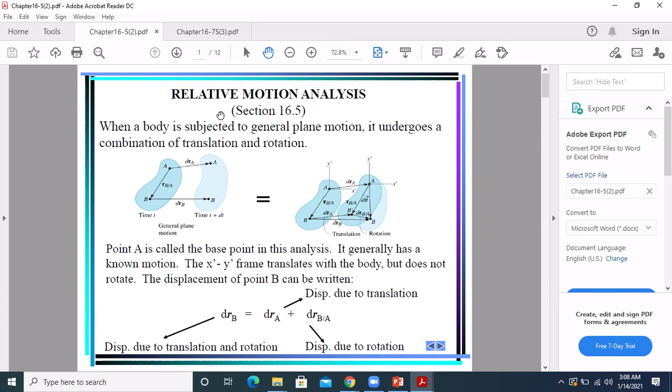لو اعتبرنا عندنا هذا rigid body بدي اقسم الموشن تبعته، طبعا هون اجي اعمل translation and اعمل rotation about an axis passing through point A اللي هي بنسميها البيس point A. So بدي اقسم الموشن كالتالي، بدي اخليه يعمل translation. خليني بس هون اعمل full screen.

بدي اخلي الريجد بودي هذا يحافظ على الروتيشن تبعه بالبداية، يعمل translation at this point، فمشى مسافة dr A اللي هي جزء من البوزيشن او displacement تاعت البوينت A اللي مشيتها because of translation لحاله. بعدين هذا الريجد بودي عمل rotation about an axis passing through point A عشان ياخد هذا الشكل النهائي، الشكل تبعه ما تغير.

فعمل translation DRA فالبي البوينت بي بسبب الترانزليشن موقعها موجود هون. بعدين صار في روتيشن للريجد بودي فصار الفاينل بوزيشن تبعها هون، يعني هاي الفاينل بوزيشن تبع B اللي بيست على الترانزليشن او روتيشن. بدي اقسمه ل translation first then rotation.

فصار عندك ال DRA اللي هو بيست على الترانزليشن، وهذا ال DRB اللي هو final position اللي هو ناتج من ال DRA plus this rotation of B من هذا اللوكيشن لهذا الفاينل لوكيشن اللي هو عبارة عن DRB with respect to A، لأنه احنا بنحكي ال rotation about a point passing about an axis passing through one of the points اللي هي point A بهذا الكيس تبعتنا. فصار عندي DRA plus DRB with respect to A عبارة عن DRB.

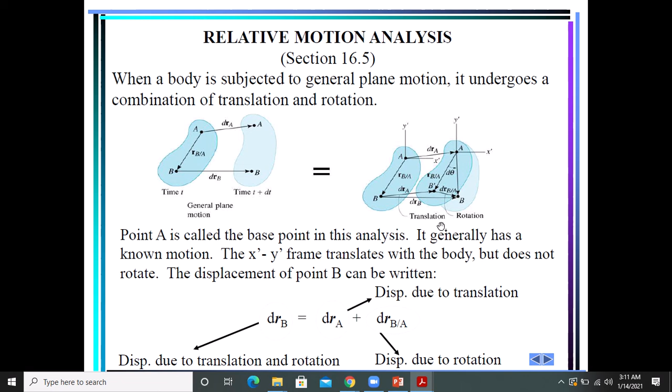So the velocity of point B is given as بدك تاخد dt for this one and this one. So drb by dt عبارة عن dra by dt plus drb with respect to A by dt. drb by dt اللي هي الابسوليوت velocity of point B اللي هي الفاينل، يعني velocity of point B الناتجة من translation and rotation، عبارة عن velocity للpoint A اللي عم بيعمل pure translation plus the velocity of point B with respect للروتيشن اللي حصل about point A.

فهي whatever rigid body عم بيعمل whatever الموشن تبعته general plane motion VA، الريجيد بودي هيعمل translation، هيكتسب A و B the same velocity بسبب translation. then B هتكتسب another component velocity بسبب rotation of rigid body about an axis passing through point A اللي هو عبارة عن الأوميجا في RB with respect to A.

Since the body is taking as rotating about point A, VB with respect to A اللي هي عبارة عن dr B with respect to A by dt عبارة عن أوميجا cross RB with respect to A. Here omega will only have a k component since the axis of rotation is perpendicular to the plane of translation.

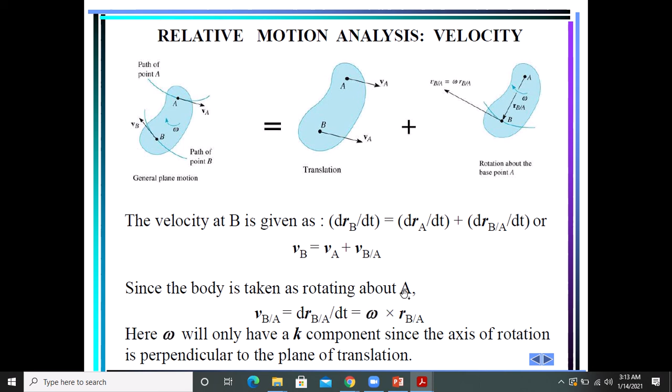حكينا already احنا نشتغل على planar motion، فاحنا راح نعتبر ان الموشن تبعتنا translation بال x y plane، وبالتالي rotation about an axis passing او perpendicular للـ x y plane اللي هو ال k axis او الـ z axis.

طيب ناخذ example relative motion analysis velocity.

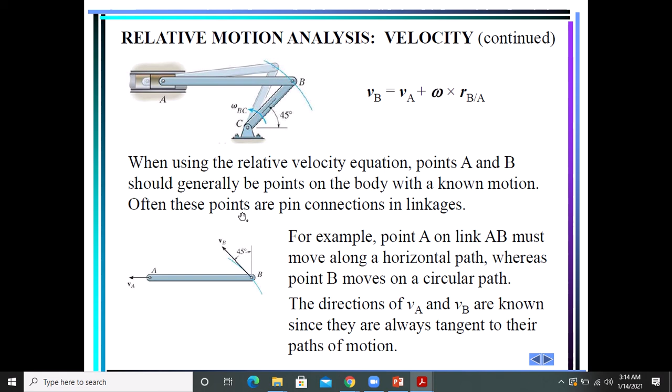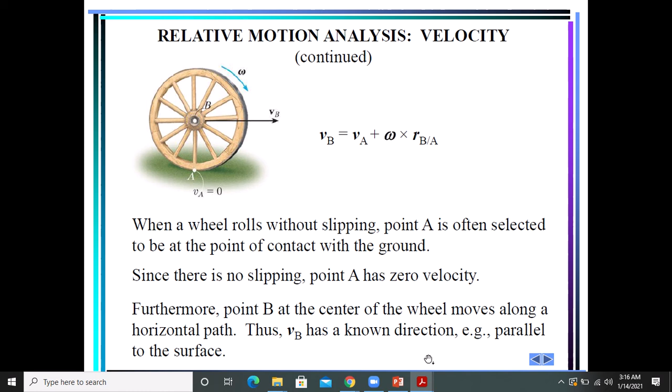Since there is no slipping, point A has 0 velocity. Furthermore, point B at the center of the wheel moves along a horizontal path. Thus, the velocity of B has a known direction parallel to the surface, for example whatever.

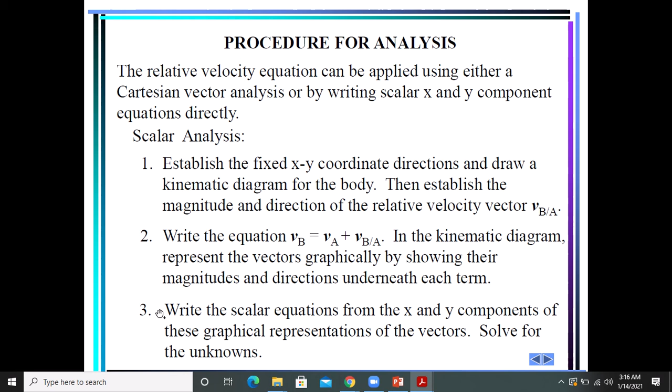Procedure for analysis: establish fixed XY coordinates, not coordinates translating with the system or with the rigid body. Write the equation in the kinematic diagram. Write the scalar equation from the XY components. Solve for the unknowns. If you want to work with vector analysis, you need to determine XY, take whatever vector components are present, express vectors in Cartesian vector form. If the solution comes out negative, of course it's opposite to the assumption you made, and so on.

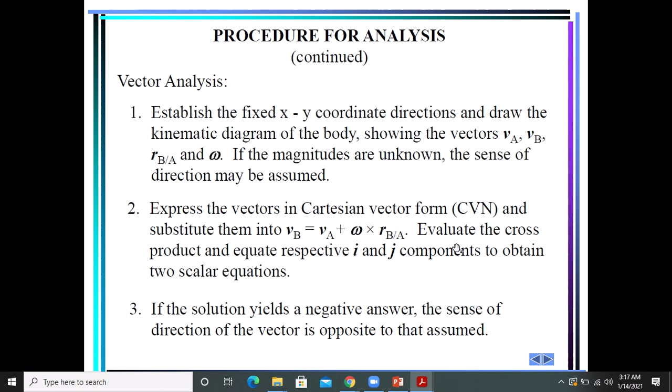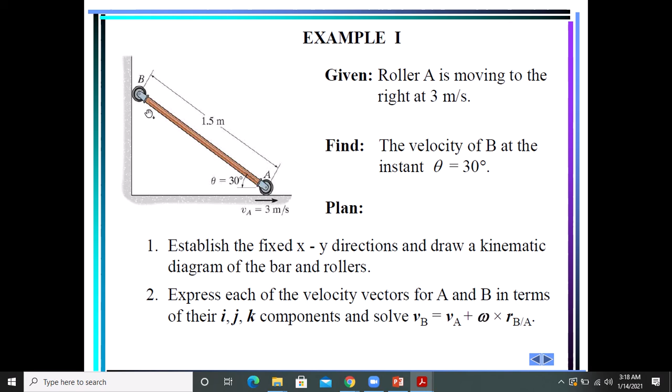If we apply the equation: velocity of B we know its direction is negative J, velocity of A we know its magnitude and direction which is 3 meters per second along the positive x direction or along I. Omega is along K, and RB with respect to A, from A to B, take 1.5 cosine 30 negative I with sin 30 positive J.

So again apply the equation: velocity of B equals minus VB in the J direction, velocity of A equals 3I, omega in the K direction crossed with the vector from A to B of 1.5 meters, so 1.5 cosine 30 negative I, 1.5 sin 30 positive J.

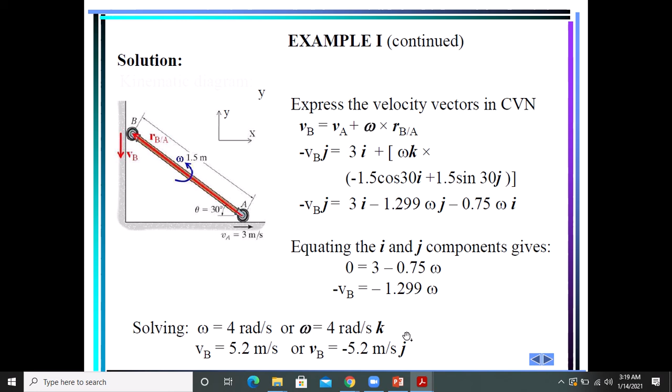So relative motion analysis, acceleration analysis for velocity and acceleration.

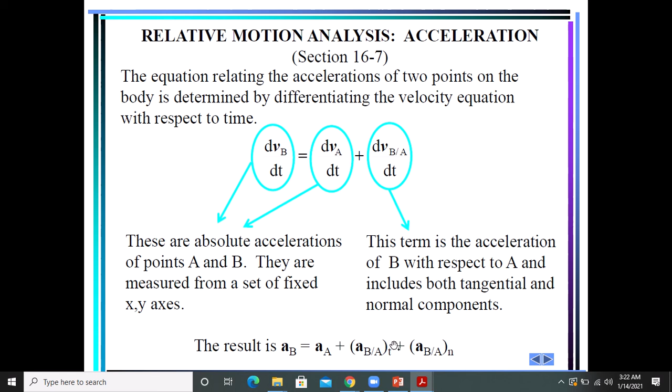So the result is: acceleration of point B equals acceleration of point A plus acceleration of B with respect to A tangential component plus acceleration of B with respect to A normal component.

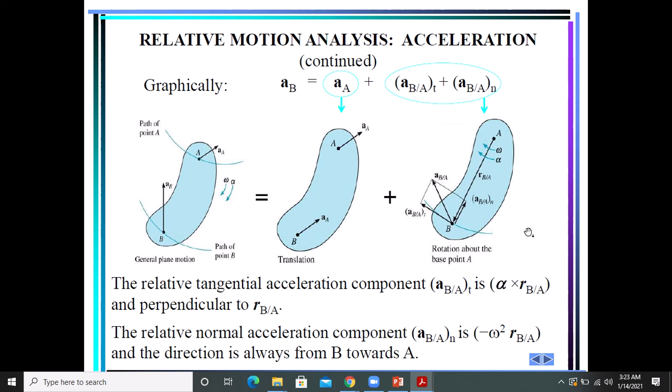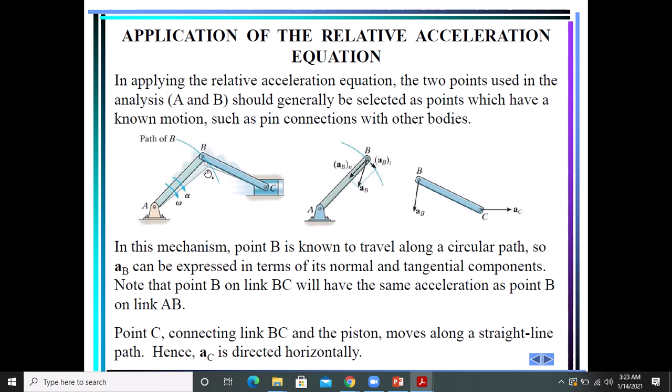Same applications, pin connections for whatever linkages, rods.

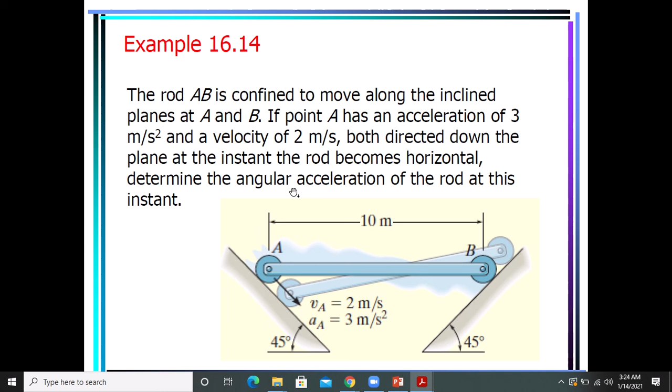Determine the angular acceleration of the rod at this instant. I need to calculate the value of the angular acceleration, alpha.

If we go to the relative acceleration equation: acceleration of point B equals acceleration of point A plus alpha cross R with respect to A minus omega squared times R with respect to A.

So I have many unknowns. Acceleration of B is unknown in magnitude, and its direction should be along the plane, either up or down.

Acceleration of point A: magnitude and direction are known.

Alpha magnitude is unknown but its direction is along K.

R with respect to A is known, from A to B, which is 10 meters along I. Omega is unknown. R with respect to A is also known, same as this one, 10I.

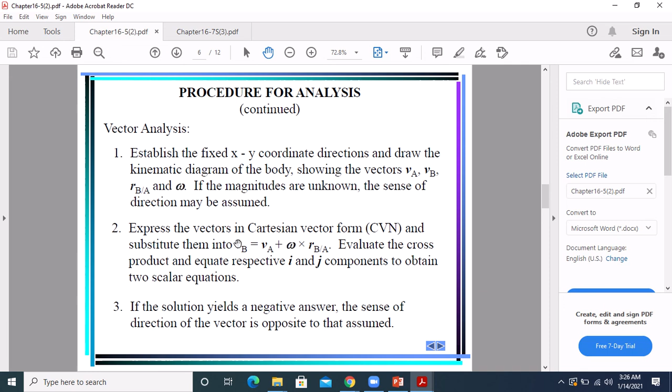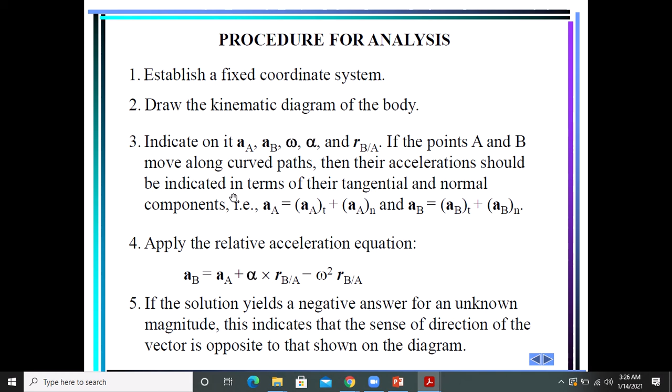After we apply the equation of relative acceleration, we calculated omega and it turned out to be 0.283 radian per second. Then we apply the equation: the relative acceleration of point B equals acceleration of point A plus alpha cross R with respect to A, minus omega squared times RB with respect to A.

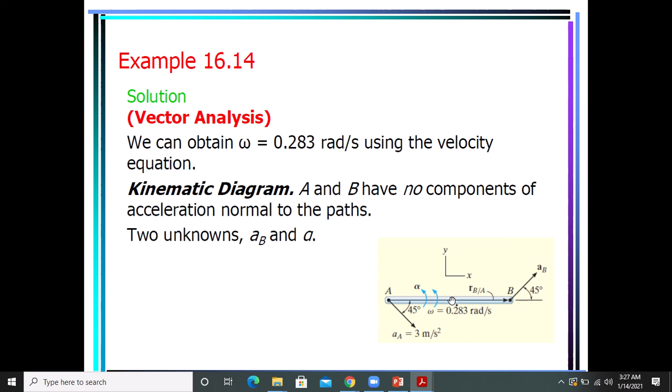Acceleration of point B analysis: times cosine 45 by I, times sin 45 by J. Acceleration of A: cosine 45 by I, minus sin 45, or sin 45 by negative J.

This one: alpha K cross 10I, omega squared times 10I. Same thing for acceleration B and its I, J components. So we have two equations, equate the I's and the J's, and we get acceleration at point B and the value of alpha.

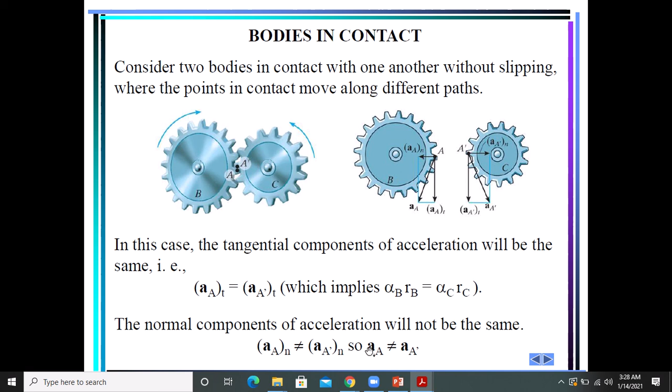So we can work on the radius ratios to get whatever the alpha values are, but the normal component will not equal the normal component, therefore the resulting acceleration of A is not equal to acceleration of A prime, but the tangential component is equal.

This is a common type of problem encountered in dynamics, which is rolling without slipping, we talked about it a moment ago. In rolling without slipping, we said the velocity of point G equals the velocity of point A.

Point of contact, which we call the instantaneous center of zero velocity, plus omega times R. Same thing for acceleration. Of course point A does not have zero acceleration, it has zero velocity but not zero acceleration.

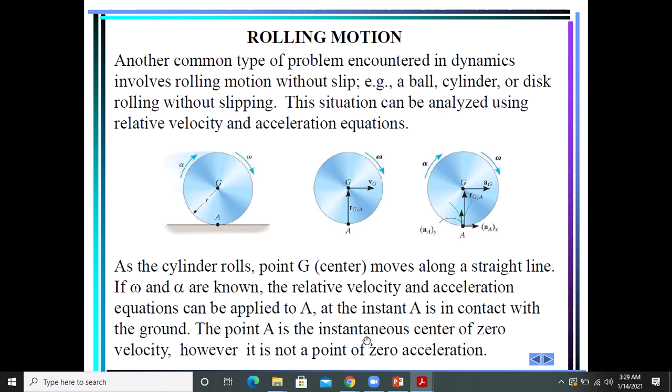So as the cylinder rolls without slipping, point G, which is the center, moves along a straight line. If omega and alpha are known, the relative velocity and acceleration equations can be applied to A. At the instant A is in contact with the ground, point A is the instantaneous center of zero velocity, however it is not the point of zero acceleration.

So you need to have omega and alpha and apply the equation of relative acceleration. This is the relative velocity of G: velocity of A plus omega cross R G with respect to A. This one is zero, so you have omega K, based on the assumption, minus omega K cross R from A to G.

Which is RJ, velocity of G supposed to be by I, so K cross J minus I with minus positive I, so the setup is valid as we agreed. Here apply acceleration of G: acceleration of A plus alpha cross R G with respect to A minus omega squared times R G with respect to A.

Acceleration of point G will be by I, acceleration of point A will be in the J direction, whatever, meaning if you take the J or the I just before touching the ground or after touching the ground.

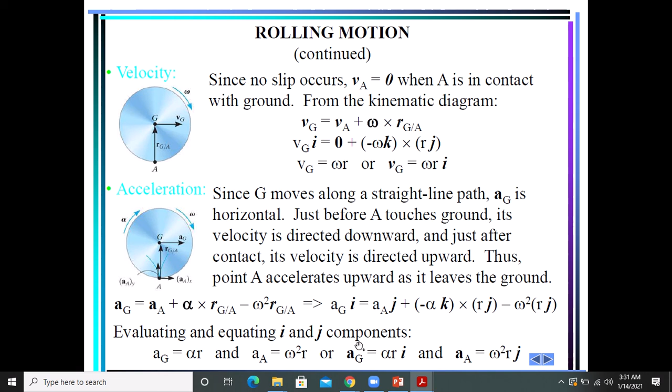If we equate the I's and J's, acceleration of point G will be alpha times R, acceleration of point A will be omega squared times R. Acceleration of point G will be alpha times R in the I direction, and point A will be omega squared times R in the J direction, as we worked on before.

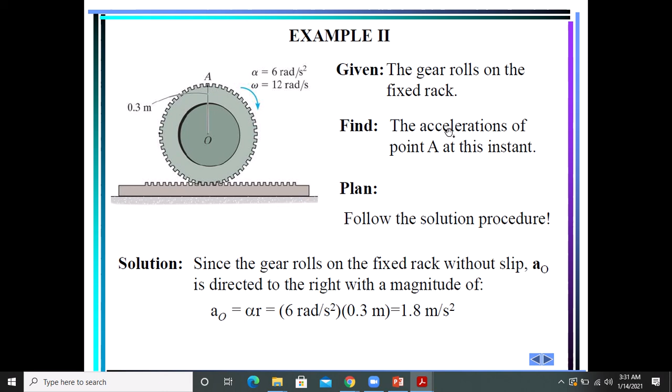Another example: gear rolls on the fixed rack. I give you the value of alpha and omega for this disk, or for this gear, and I tell you the radius. We need to find the acceleration of point A at this instant.